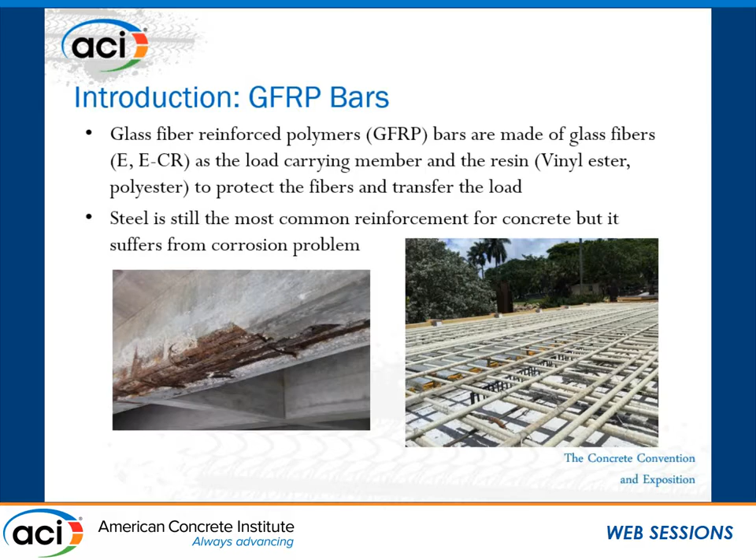As you may know, GFRP stands for glass fiber reinforced polymers. GFRP bars are made of glass fibers as the load-carrying members and resin, which protects the fibers and transfers the load among them. We all know that steel rebars are still the main and traditional reinforcement for concrete, but steel suffers from the corrosion problem. The corrosion of black steel lowers the service life of the structure and eventually leads to repair and maintenance costs and in some cases even safety issues.

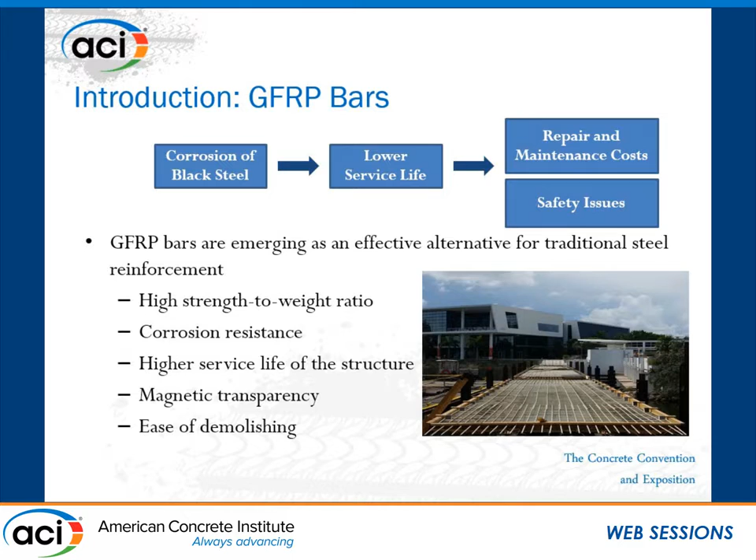On the other hand, GFRP bars are emerging as an effective solution for resolving this problem, especially for structures exposed to aggressive environments such as bridges, seawalls, and marine structures, and they offer several advantages. The most important for us is corrosion resistance, because it's a composite material. High strength-to-weight ratio, generally 4 times lighter than steel. Magnetic transparency, which makes it ideal for construction of MRI units at hospitals, and in some cases ease of demolishing in temporary applications.

One thing that is going to help GFRP technology get widespread applications, especially in construction and infrastructure, is providing more and more proof of its long-term durability, because for any composite material in any application, long-term durability is a big concern. Usually the approach taken in the literature is simulating the concrete atmosphere. Solutions with high alkalinity and sometimes elevated temperatures are provided for the GFRPs to be exposed to, and then the residual mechanical properties are studied.

But the approach we are taking in this study is using real samples from real field structures, extracting them after years of service and investigating what has happened to them after a decade or 20 years of service. We believe that is a real indication of whether it has long-term durability or not. Because of the difficulty of this type of project, the coordination for sample extraction, ownership problems, safety issues, and traffic control, there are only a few such studies, and the purpose of this study is to contribute more to this part of the literature.

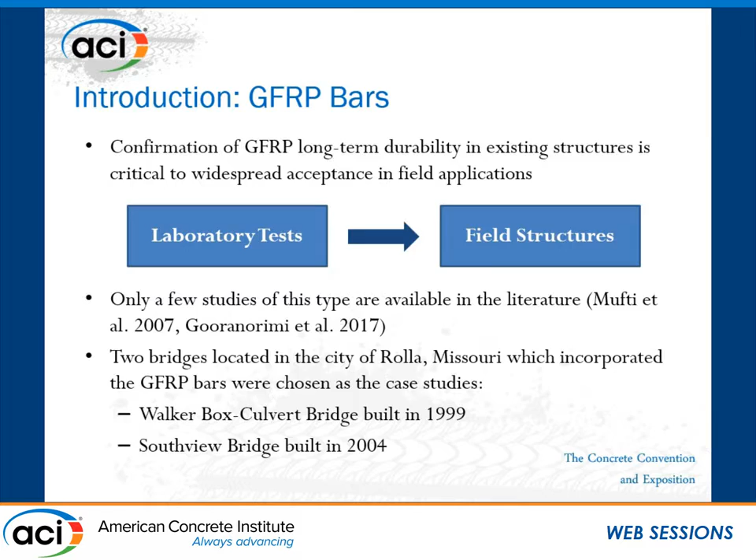For our study, 2 bridges, both in the city of Rolla, Missouri, have been chosen. One of them, which I will refer to as Walker, is a box culvert bridge built in 1999. The other one, which I will refer to as the Southview Bridge, is in the same geographical location and was built in 2004, and both incorporated GFRP as part of the construction. I will talk shortly about these two structures.

The Walker Bridge was built in 1999 in the city of Rolla, Missouri, to replace the old bridge. Here you can see the old bridge, which was made of concrete and 3 encased steel pipes, and it was unsafe to operate because of the extensive corrosion of the steel pipes and also cracking in the concrete.

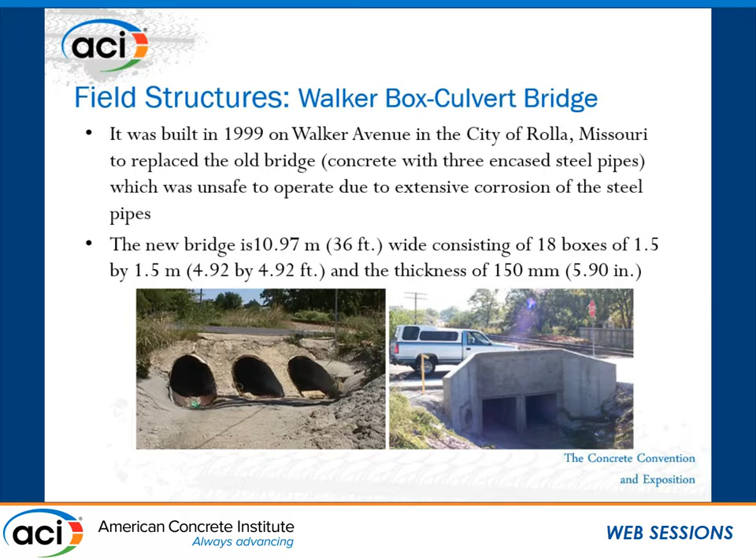The new bridge is made of 18 boxes in 2 rows of 9. The boxes are 1.5 by 1.5 meter with a thickness of 150 millimeter, and the total length of the bridge is 11 meter.

The reinforced concrete boxes were made of concrete and entirely number 2 GFRP bars. As you can see here in the picture at the right, there is a GFRP cage completely made of number 2 GFRP bars, and that is basically the only reinforcement for these boxes.

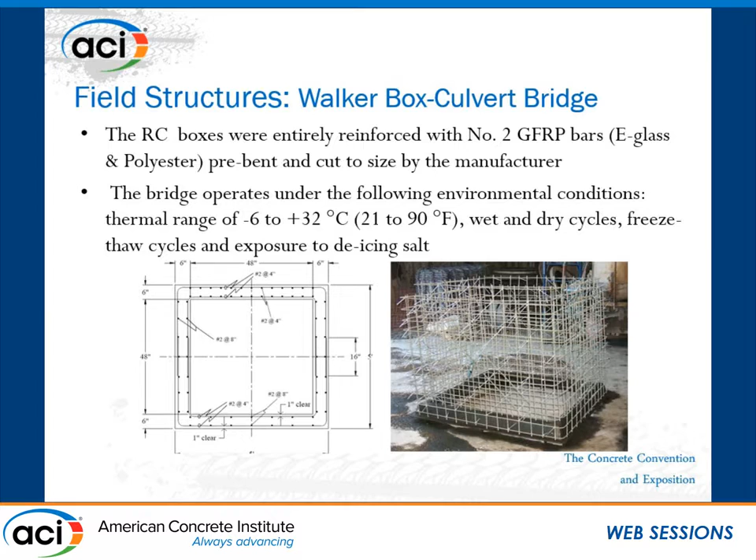In order to share with you the exposure of this bridge regarding the environmental situation, the bridge was exposed to a thermal range of -6 to +32 degrees centigrade, wet and dry cycles, freeze-thaw cycles, and also exposure to de-icing salts. So it has been exposed to different types of extreme situations, and it can provide us a good case study.

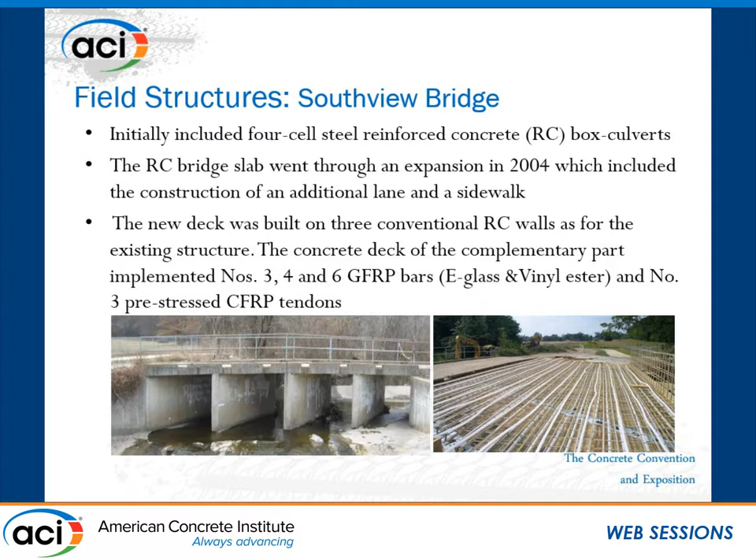The next bridge, which I call Southview Bridge, was originally built with 4 steel reinforced concrete box culverts, but the bridge went through an expansion in 2004 with the addition of 1 additional lane and a sidewalk. Number 3, 4, and 6 GFRP bars were used, and also number 3 prestressed carbon FRP tendons in the construction of this bridge.

In 2016, expert personnel extracted several concrete cores from these 2 structures at different locations. The samples were taken from the bottom surface of the GFRP box culverts, which logically has been exposed to more moisture, and also from the bridge deck of the Southview Bridge.

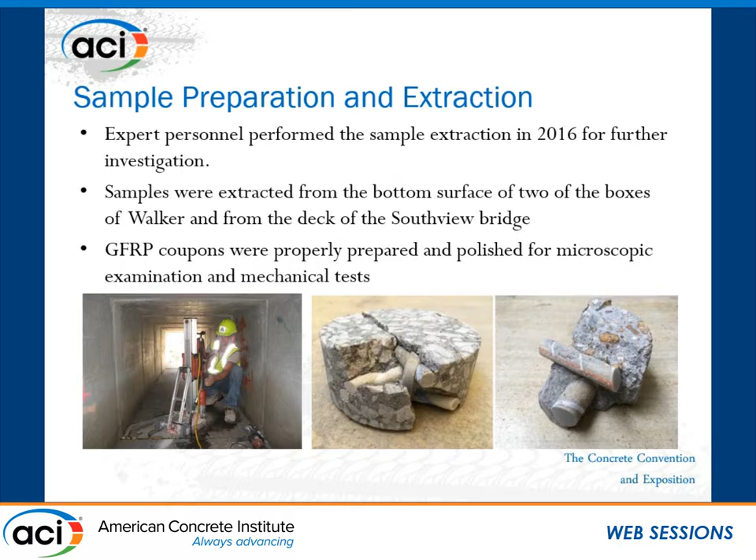After the samples were shipped to the University of Miami lab, we started working on the samples, trying to extract the GFRP bars, and as these bars are really valuable for us and we didn't want to lose any part of them, it takes lots of patience to remove all the pieces of GFRP in those cores.

After the GFRP were taken out from the cores, before characterizing the GFRP itself, first we provide a general characterization of the concrete itself to show what has happened to the concrete after 12 and 16 years of service for these 2 bridges. So first, the pH of the concrete was found to be in the range of 11 to 12, which is an expected range for the type and the age of the concrete.

We also performed the chloride diffusion test and carbonation depths, and we found that there was no carbonation in the concrete cores and also no sign of chloride diffusion.

So while having no carbonation could be an ideal case for steel rebars because it postpones the corrosion, it's completely different, a worse situation, for the GFRP bars, because when the alkalinity of the concrete core is higher and there is no carbonation, it provides a more severe case for the GFRP, because GFRPs theoretically are supposed to be weak in alkaline environments.

So from now, the main focus of our study started, which is the characterization of the GFRP itself. Different mechanical tests and microscopic examination were performed on the extracted samples, which included SEM analysis, EDS, horizontal shear test, glass transition temperature, and also fiber content. And I will go through each of them one by one.

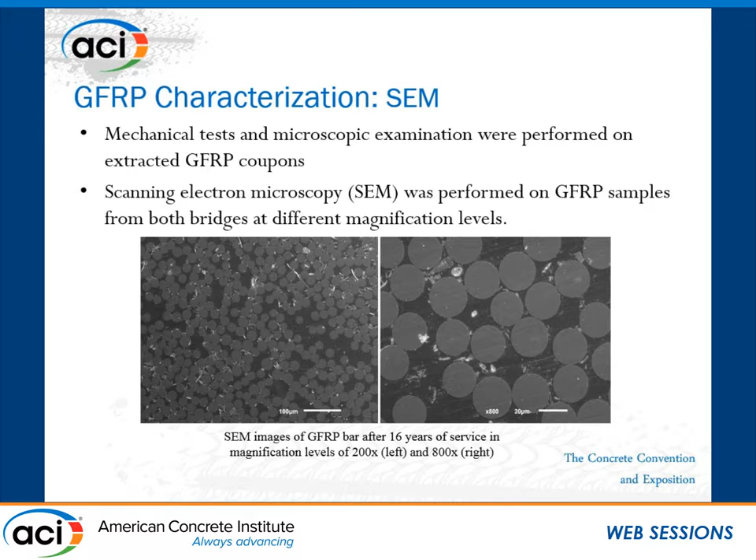So basically, if you see this photo, which is taken after 16 years of service, and this one, after 12 years of service, basically nothing has happened to the microstructure of these GFRP bars. I think this is one of the strongest pieces of evidence that we can provide that these materials are durable, and in a real field application, they can be a proper solution for corrosion of black steel rebars.

So as I mentioned, no apparent sign of deterioration in the fibers, matrix, and also fiber-matrix interface was observed. Glass fibers appear to be intact with no loss of cross-sectional areas, as you can see in those two pictures. And we take it one step further.

We performed the EDS analysis, and the purpose for EDS analysis was to provide the existing chemical elements in these materials to see whether there was any sign of attack of any chemical or alkaline elements. And again, we saw no sign of chemical attack.

The elements that we found in these two representative samples were the elements that we generally expect from GFRP samples, right? So there were silicon, aluminum, and calcium mainly, which are the main components of the glass fiber, and also carbon and, of course, the oxygen for the resin itself. And it was the same situation for both bridges.

From now, our tests are mainly from the mechanical point of view and not the microstructure anymore. One of the most interesting ones for us was the horizontal shear strength. This plays a really important role as an indication of durability, because horizontal shear, as you can imagine, deals with the mechanical properties at the interface of fibers and resin. And any kind of degradation, we can see at the interface, and then the loss of bond between the fibers and resin, and eventually losing the load-carrying properties.

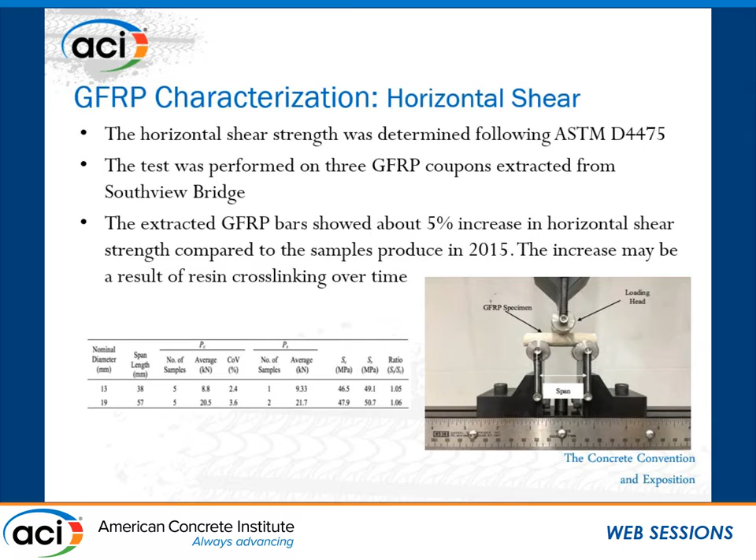The next test we performed was dynamic mechanical analysis, DMA, to investigate the glass transition temperature. That parameter is also really critical for us, because this is the temperature beyond which GFRP bars lose their ability to transfer the load dramatically, because the state of the resin changes from solid to a liquid type of stage. So the dynamic mechanical analysis was performed following the ASTM E1640.

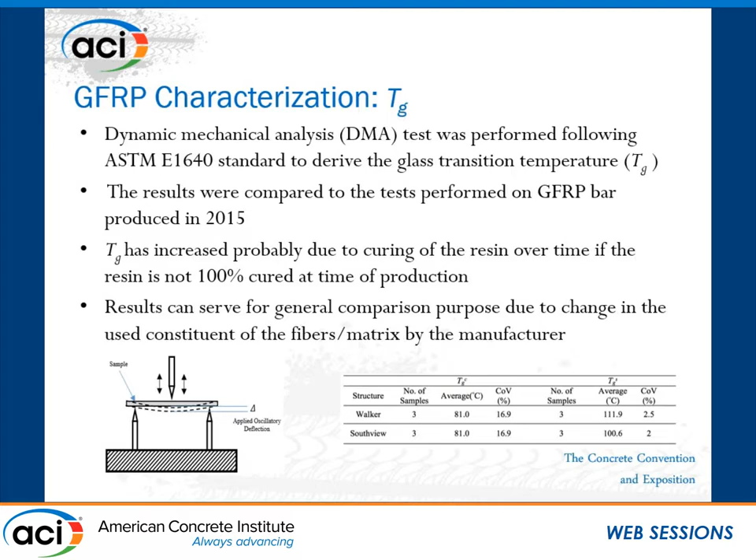And again, the result, the same as the shear test, was compared to the samples from the same manufacturer but produced in 2015. And again, we found approximately a 25% increase in the glass transition temperature over the years. And we saw the same type of result for different studies that we performed. The reason we believe this increase can happen is the additional curing of the resin over time with the exposure to sun and cross-linking the polymer. So this is another sign that this critical parameter of GFRP bars has not been degraded at all after 16 and 12 years of service.

And finally, the fiber content. The fiber content test was performed following the ASTM D2584, and the results again were compared with the tests produced in 2015. The measured fiber content, as you can imagine, was exactly in the expected range and still well beyond the minimum requirement of 70% by mass. So the results were 82 and 73%, which are in the exact range that we expect to see for the fiber content ratio.

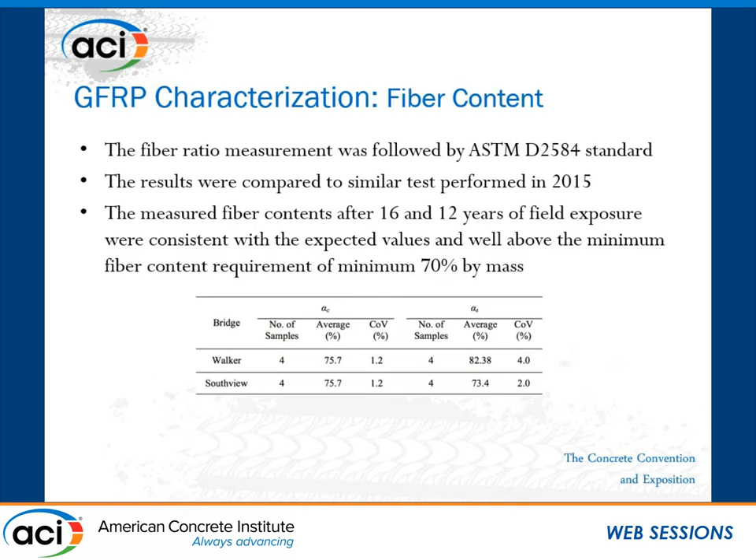So as a conclusion, as I mentioned, GFRP and concrete samples were extracted from 2 bridges, both of them more than a decade old.

First, the concrete was tested, and the pH was in the expected range. No carbonation or chloride diffusion was observed in the concrete. Next, different mechanical tests and microscopy examination were performed to provide evidence of the durability of this material. The microscopy examination did not show any sign of GFRP degradation nor any sign of chemical attack on these materials.

In terms of mechanical properties, the horizontal shear strength showed a 5% increase compared to the benchmark values, and the same was the case for the glass transition temperature, and the fiber content was in the exact expected range.

So the main message of our study is that GFRP is a durable material, and this study shows that after years of service, basically nothing has happened to this material. Specifically for structures exposed to aggressive environments, as I mentioned, such as marine structures, bridges, and seawalls, this could be a perfect and effective solution for removing the corrosion problem of steel rebars.

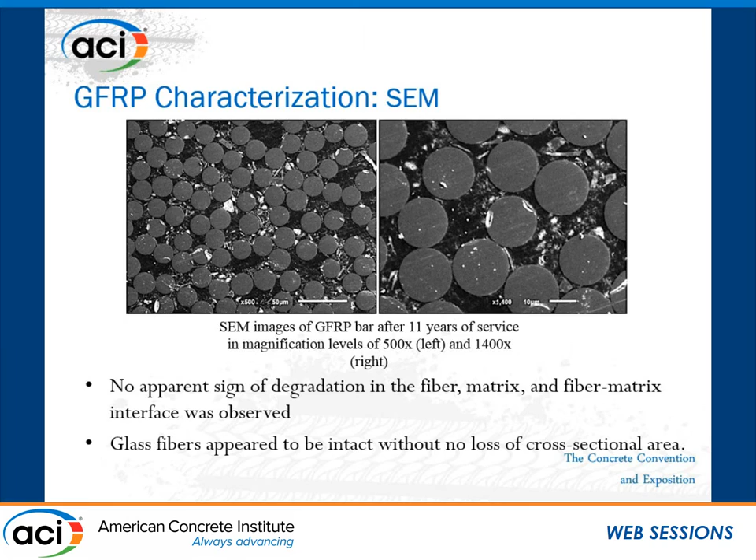No deterioration, nothing, and those spots were still there, and in the EDS we don't see any chemical changes. So mainly they are part of the roughness of the surface. Let me show you here in this image. I did a better job polishing probably, and in this one there were slightly more spots, and also some residues that stay there during the cleaning. This one is the perfect evidence that there are no additional elements or chemical attacks.

Do you have any information about the concrete mix that they used in those bridges, and is that information published? And the other thing is, I'm really not sure if the argument that there was a 5% increase in the shear strength is really valid. We don't know what the original material was, and I'm wondering if there was degradation. Can any of the other tests you have done say that we don't have any indication that the shear strength would have suffered?

I completely agree with you. As I mentioned, the perfect situation would be having the exact samples, and we had that situation for a different bridge in Texas. We compared the shear test with the same shear test data performed 15 years ago, and those are the perfect evidence. But still, we cannot perform these tests with several repetitions of samples, because we cannot core more than a certain amount of samples, right?

So at the end there would be limited samples, and especially in a transverse shear test, production lot by production lot, there is a variation of even 10% to 15%. So this is part of the general statistical evaluation error. Even if we have the historical data for the exact GFRP bars used in that bridge, we are not sure it is the same bar we are taking out. So again, we may see a slight difference, a slight increase.